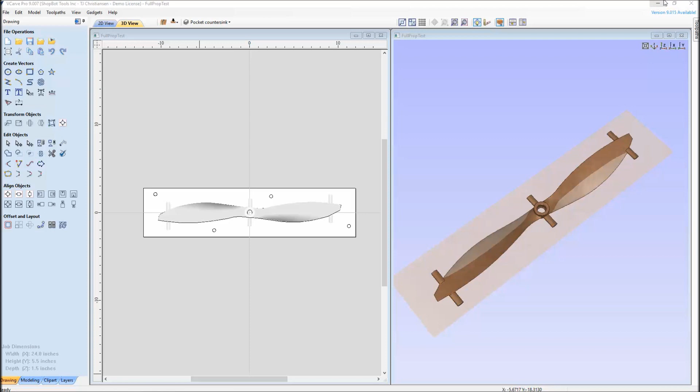This is TJ with ShopBot Tools, and today's online training is going to talk about two-sided 3D carving. So what we'll do is we'll first look at our file here, and then we'll go out on our machine and show you the process of trying to flip this part over so it lines back up so we can cut it from both faces of this material.

After we get the design portion ready in the software, what we'll do here is cut it from the first side. Use our layout holes where we use 3/8 dowel pins, drill those in, switch the board back, do the same dowel pins in the spoil board, flip it directly over on top of itself, lining up using the dowel pins, and then cutting the second side. Hence the two-sided 3D machining.

A good portion of this training will be using the Vectric software, and I will tell you that a lot of the information that I am using comes straight from their video tutorial browser. They already have a wonderful set of videos and tutorials, and I'm referencing today a lot. When I first started getting into doing the two-sided carving was this two-sided marlin, where I could go in here and watch the different tutorial on all the specifics to the Vectric software. So I'm going to cover a lot of these today as well, but I'm going to show you more tips and tricks for setting this up on the actual ShopBot.

So I'm going to create the new file, and today's job is, as you saw in the example, I went and got a 2x6 from Lowe's or Home Depot. It's something easy to practice on. So if you make a mistake, you forget your tabs, your hold down, you flip the wrong way, it's out of a piece of 2x6 pine. It's not the most expensive wood. And then once you get the system down, you've done it a few times, then it's nice to go into something a little nicer quality wood as far as the way it's going to turn out.

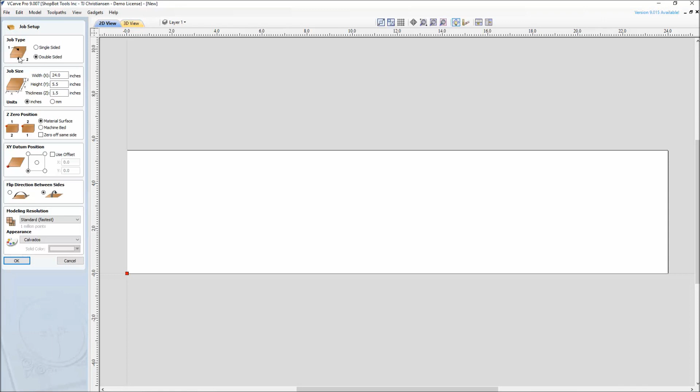So let's just go through, and again, I'm going to paraphrase a lot of that tutorial. It is a double-sided machining because we're going to be cutting from two faces. The material I have here is 2 foot long. It's a 2x6, so it measures approximately 5.5 inches wide, and the thickness on that material is 1.5. The way I like to set up a two-sided machining, again, there is no right or wrong. It's all personal preference. And this is just what I've done for a few of my two-sided machinings and had success, so I'm sharing that with you today.

The material surface is where I like to zero, but I also like this option that Vectric has put in here where you zero off the same side. So what that allows me to do is on the first face, I zero off the top. And then when I flip it, I'm able to zero off that same top even though it's down below. So I'll actually be zeroing to the machine bed next. The software takes into account the flip and does all the math for you.

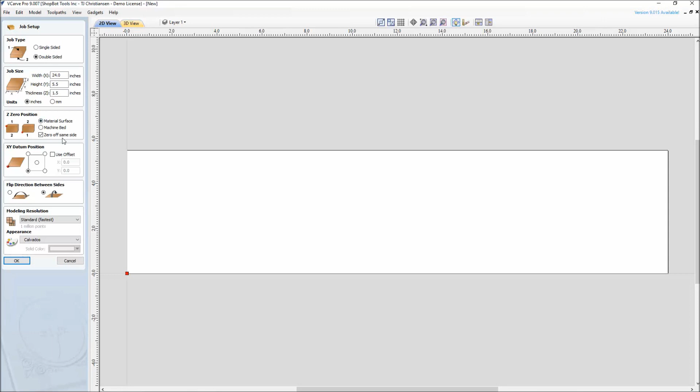The key though is the XY datum position and moving that to 0, 0. That way your flip plane, whether you're flipping along the X or along the Y, and in this case I'm going to flip over across the Y. So what's nice about having your XY datum position in the middle, it gives you a plane here that's easier to flip. And whatever your job size here, if you're off a little bit as far as width and height, this helps take that into account with your 0, 0 in the middle.

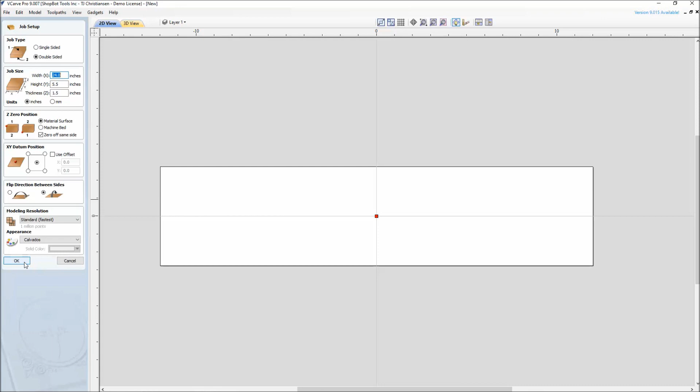So with that being said, I'm just going to double check this. I got my material size. I've cut it down to 24 inches. It's just a 2x6. In inches, I have a 0 plane on the top with a flip, 0 off the same side, and I'm going to go ahead and hit OK, and that sets up my job. I just need to remember which direction I'm flipping between sides.

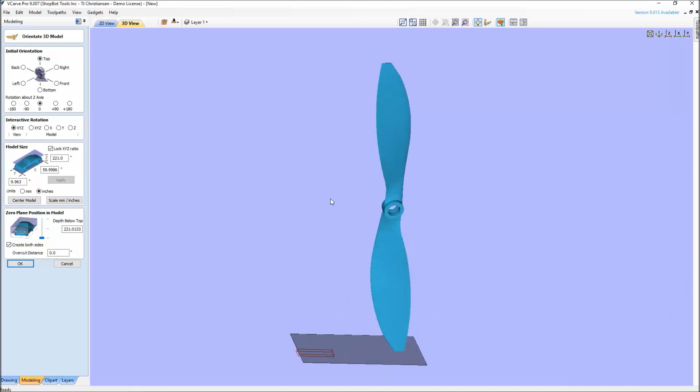Now we have to import the model, and the way we do that is come down here to the modeling tab, and up here is import component or 3D model. And today's example is going to be using a two-sided propeller, so I'll bring in the prop file. And a lot of imported 3D files come in a lot larger. Here's my material down here. This solid line box is my material. This wireframe box here is my material.

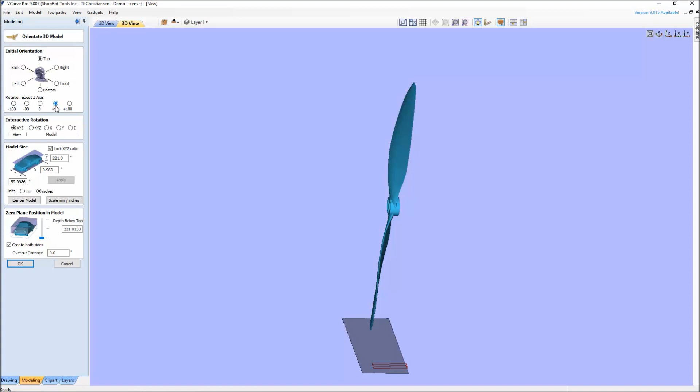My propeller is obviously quite large and out of proportion and orientation. So I will just sit here and manipulate the way I want to bring this in, which face I want to bring it in from. And that's just a matter of me messing with this model, and this is exactly what you would have to do as you brought stuff in.

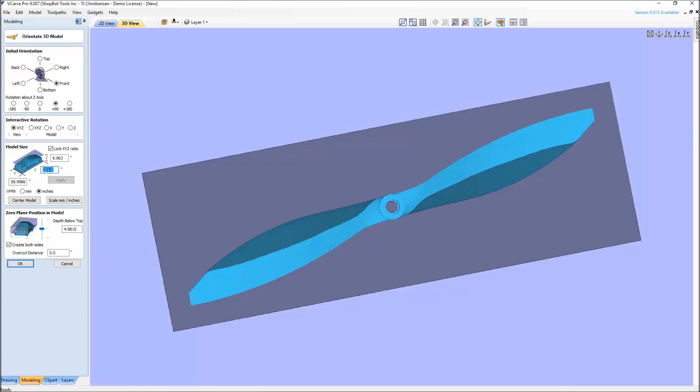I'm going to center that on my material. It hides it down in there. And since my material is only 24 inches long, I'd like it to only be about a 20-inch long prop. I hit apply. I can see that it's on there still, but it's still really close to the edge.

I want to look at this straight from the top, my Z, and I can interactively rotate this too by clicking on my Z, and that allows me to spin the propeller and get it straight back and forth so it's in there. So I've scaled it. I've got it flat, the direction I want. That's just a matter of you playing with the model that you're going to bring in.

I do want to create both sides. I do want it centered. I do like to center my models when they're proportional like this. Otherwise, you can mess with the up and down direction here, but it is nice to double click here, keep this centered.

And then I do like to have an overcut that goes at least past. I'm going to use a 1/4 inch diameter ball nose, and really you only need to go the radius of that bit, so you get past what they call the cusping, and that helps you get past where that ball nose portion of it is. I tend to do a little bit more dramatic with my overcut, and that gets a little bit more past, if I was off on my material thickness or whatever. So I just leave this right at my bit diameter. It just helps me remember things too.

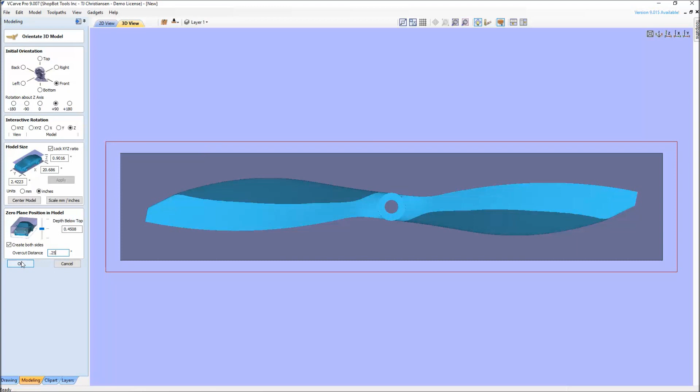So overcut, create both sides, and I've got it now in my model inside my wireframe. I'm going to go ahead and hit OK, and we're ready to move forward and set this model up. Set this up just like we did in the VCarve Pro. So first thing we're going to do is hold down our board, and I'm just eyeballing it off the bottom left corner, even though that's not where we're going to 0 it.

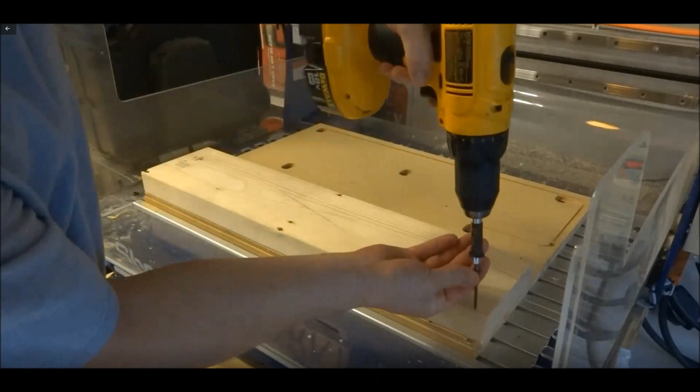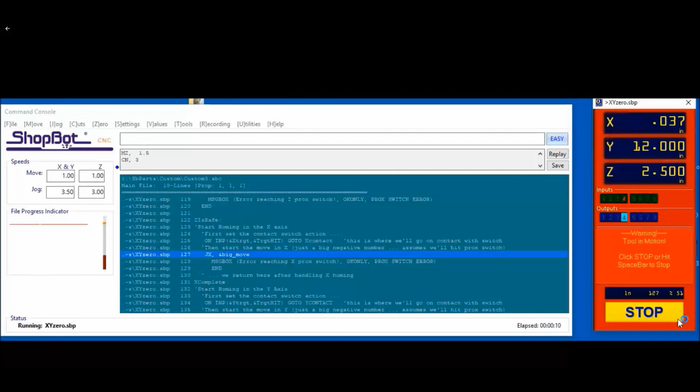And I pre-drilled the corners, and I'm opening up my ShopBot software, and I'm going to 0 out my X and my Y axes first. So use the proximity switches so you're working off your bottom left corner. That way you've got a reference in case you ever lose power or you have to reset or anything. So we'll start there. It sets us up, goes over, goes off 0.

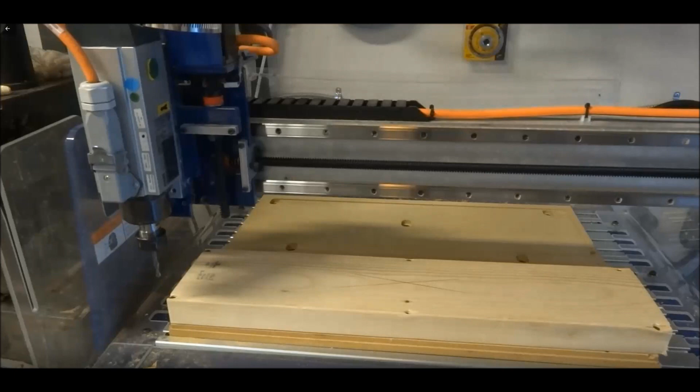Now remember, in the drawing CAD file, we're using the center of our material, which is where the X is. So now I'm going to use the keypad in the software to eyeball that and get it close. So bring up the keypad, go back and forth until you get it in the X and Y. You can switch it to fixed mode. Fixed mode allows you to dial it in so you can get it real close. You can also 0 your Z axis right now and just get it down until it touches. And then you can temporarily make your new 0, 0.

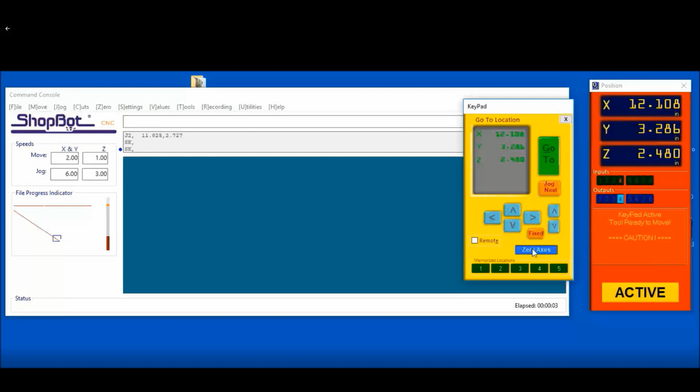So what we're doing is we're making a temporary 0, 0. If this is new to you, you might want to look in temporary zeros and offsets. Maybe look into the documentation or training. But what I'm looking to do here is I want to make this center of my bit my new 0, 0 point. And I zeroed it off the proximity switches first because that's how far I just moved it over in the X and in the Y.

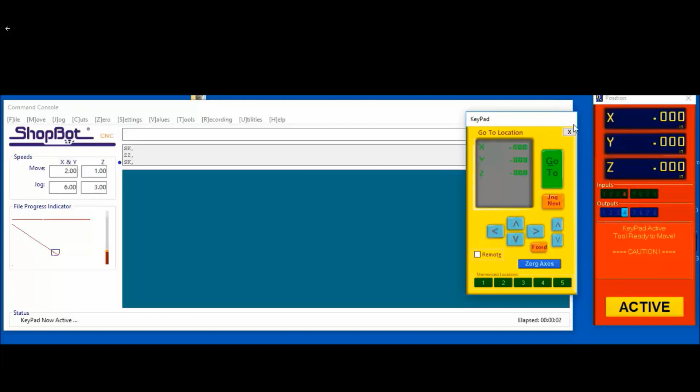And I have those as reference numbers in case I have to reset my computer or I lose power or anything. But I am clicking on my X and my Y, and I'm zeroing them out right now, and I've made my temporary 0 to run this file.

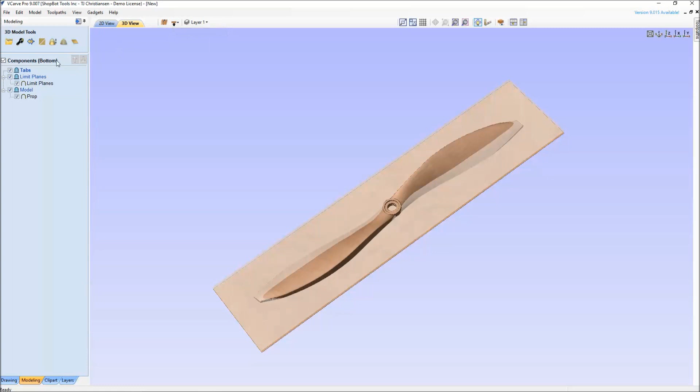So in the Vectric software, again, looking at the two-sided machining, if this is your first time, I would really recommend looking at some of the other tutorials. But for you first timers that are watching this one, up here is where you can switch between your top and your bottom plane. You can see it changing here. If you have both your 2D and your 3D forward, when you click between, you can see this scale gets grayed out when it's on the bottom.

And you see the arrows also when it switches between the top of the two. And over here, again under your modeling tab, you have your limit planes. And you can always go in here to your properties and see where they're at. Again, if you're going to be doing more of understanding how 3D modeling works, and in essence you've never done it before, I would go back to the Vectric tutorial.

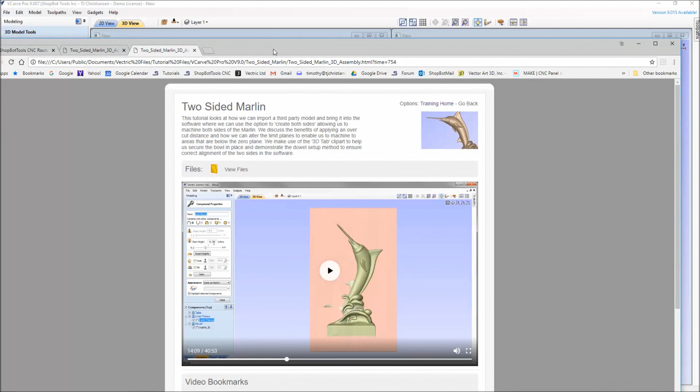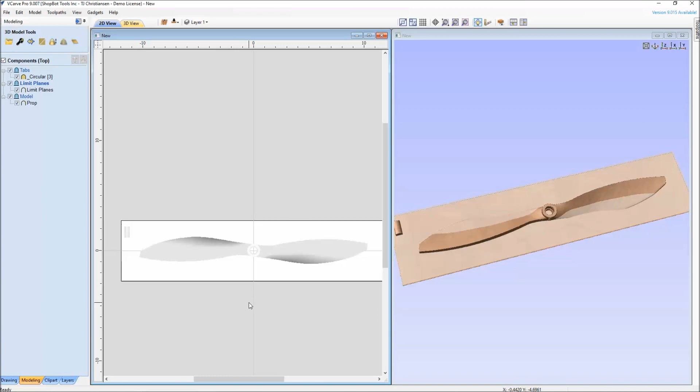What I want to show you more today is you've watched the tutorial, you understand how the software works. Now let's put it on the ShopBot and flip it and cut it and make sure it lines up. We'll also need to add tabs to this propeller to keep the part, one, from vibrating during the cut and affecting the edge quality, and two, just from falling out as we cut through it. So I've included a tab in the file that you can download for this.

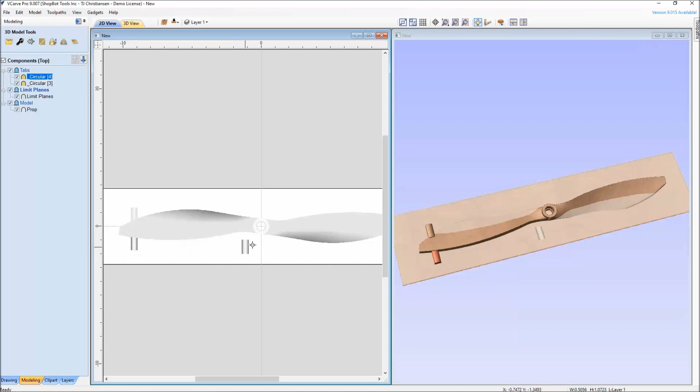You could create your own, but what I'm going to do is just place this tab, and instead of making 6 new tabs, I can just hold Control on my keyboard, and that allows me to drag a tab and drop it. And I like to just do one by one and place them. With this being a very thin propeller, I really don't want to take any chance of the whole thing vibrating. So I'm going to go ahead and manually put my 6 tabs in place.

So here's your tabs up here underneath the component tab, and you can click on it and see the shape height. So if you want to increase tab size, obviously you can grab the tab here and stretch it in width, which also changes the height because it's proportional, being 3D. And again, that's where you can change all the tab sizes if you want.

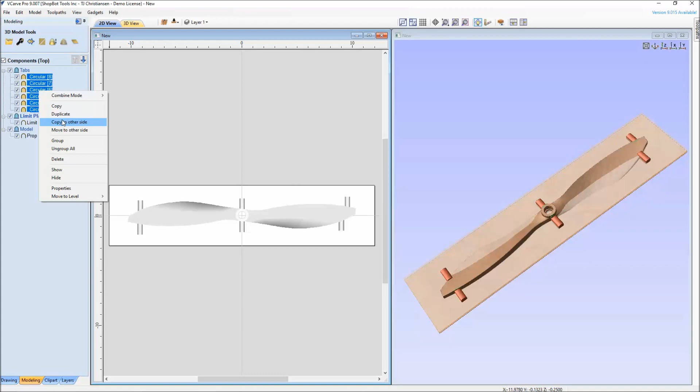And what I'm going to do is select all 6 of my tabs, and right click and go copy to the other side, because I want these 3D tabs to be on the front and the back side of this. So when I hit copy to other side, it now puts the tabs on the other side. So when I switch between my 2 sides, I can see that the tabs are lined up on both sides.

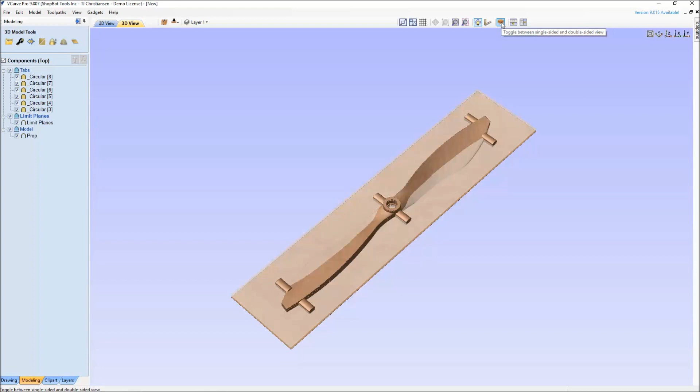So with the tabs in place, I can maximize my 3D view, and what's nice about the software here is I can hit the equal sign, or I can toggle by clicking on this icon, and it shows me how big my actual tabs would be on both sides. So I can see I have a pretty good tab, and I could sit here now and mess with heights and whatnot and get the tabs centered in here. But again, use the Vectric tutorials that already exist for that.

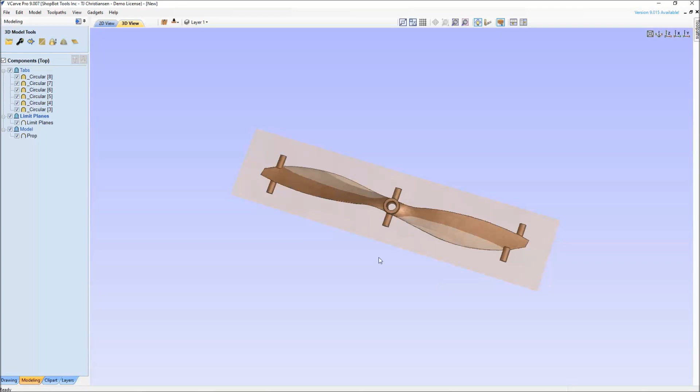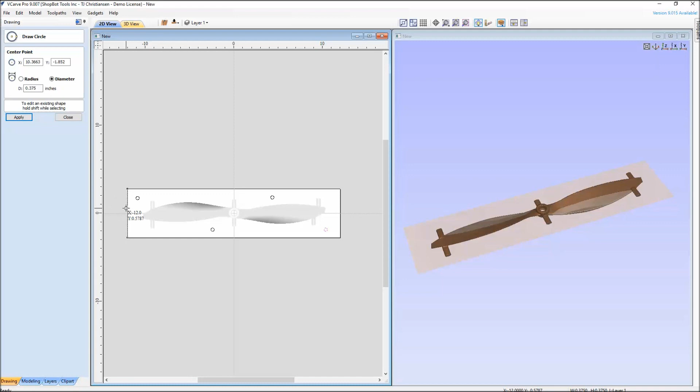Let's go ahead and get this toolpath and set up for machining and flipping on the ShopBot. And to make it easy on ourselves, when we go to flip this, we need some alignment holes. So what's nice is the circle command. I like to use 3/8 dowels, and these I just randomly put in. You don't need to symmetrically put these. If you do, when you go to flip the thing, it'll be easier for you to accidentally flip it the wrong way. So just randomly put in those 4 holes. Those will be where my dowel locations get drilled into the material and into the spoil board for flipping.

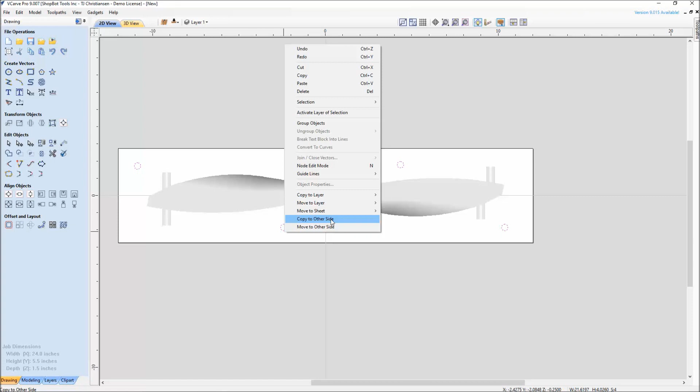So let's maximize this here in the 2D view. And just remember, once you've got these 4 drawn, or however many you put, I just want to select the dowels. And once you are done, right click and just do a copy to other side. And when you do a copy to other side, when you do your flip, it shows you that it put them in the mirror direction that you have it oriented for your flip. So just keep that in mind. Again, all in the tutorials for the drawing software.

Let's get into toolpathing and show you how this is done out on the machine. When you first switch to the toolpath side, it will bring up your material setup, and the software allows you now to make sure your model is positioned in center. So if it's not, you can just double click on center. It moves you back in the middle. And just double check, if you don't have any clamps or anything, your Z gaps and home position.

I like to move mine back a little. I have the room on my ShopBot, so when I'm done, you'll see in the video it goes back 10 inches, which goes out of my way, so it's not in my way when I'm ready to flip it or use the screw gun or change bits or whatever it may be.

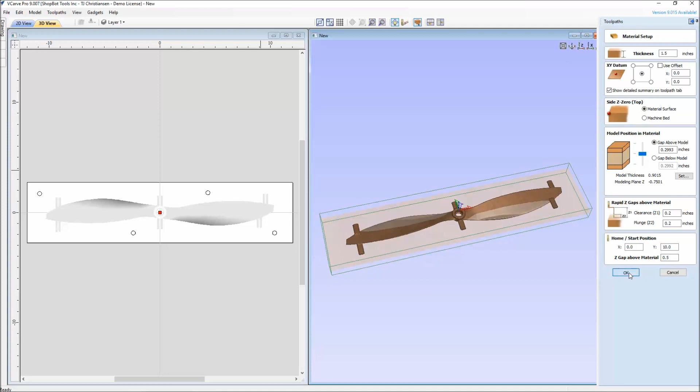And then for me, again, what I was trying to say is when I don't have to change bits, that's great. So to get a finish on a propeller like this, I can get away with using a 1/4 inch ball nose. So I'm also going to use that ball nose for my dowel pins, which I'll just use a profile toolpath. Since it's an inch dowel, I want to go half of it into my spoil board and half of it into my material.

Being that it's a ball nose, I just want to cut a little bit deeper into the material and the spoil board, so I'll just go a little bit deeper with my 1/4 inch ball nose. The top side, I'm a little bit more aggressive with my cuts because there's still a lot of material left. So I'm going to go 5/8 deep with my 1/4 inch ball nose, and I'm going to just add a spiral ramp to those 4 holes right there.

And that'll be my top. I'm on my top side still for toolpathing this, and I want to call it that so I know what this is. This is a dowel hole. Let's see if I can spell here. Dowel hole for top of board. And I'm very clear on what this is called because when I get out there, I've got a lot going on with the flips and whatnot.

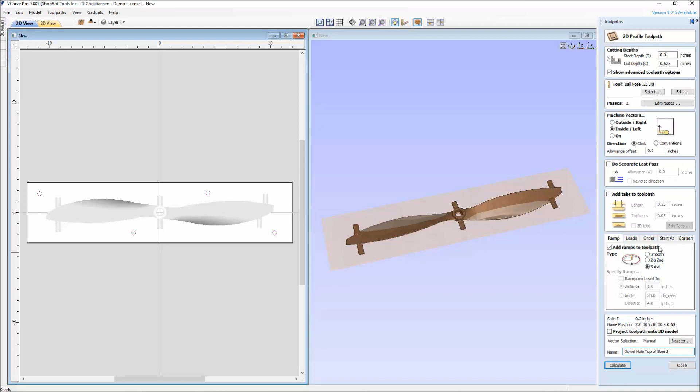So I've got an inside ramp cut, and I'm going to calculate that. And it's going to show me right here on the spoil board on the 3D, and there's my start back there. It comes in, cuts my 4, and there are my 4 cuts for the dowel holes. So that's just going to be the location. The next thing that we'll have to do is come in and do the roughing toolpath.

So the roughing toolpath is this one here, and I'm going to use that same bit. Again, I'm just saving myself a bit change. It's just a personal preference. I'm going to reference the tutorial from Vectric, and I like to do selected level, and I like to do it from my model level. And the boundary offset needs to be equal to whatever your tool diameter is. So I'm going to use a 1/4 inch bit. I have a boundary offset of a 1/4 inch.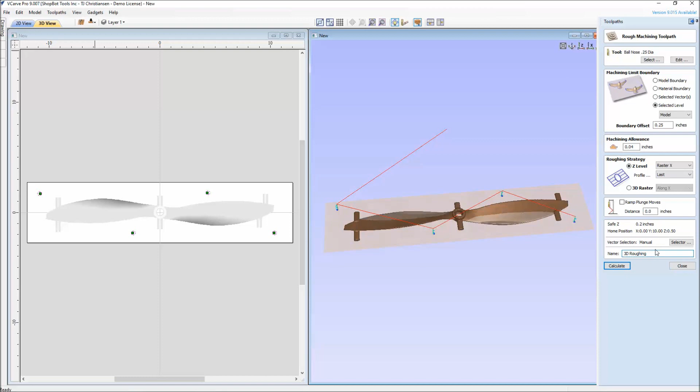And then machining allowance is how much material you want the roughing to leave on top of the finished cut. So 30 or 40 thousandths is fine. And again, instead of just 3D roughing, I'm going to call this 3D roughing top side so I know which one it is. And I calculate that, and it starts bringing this one in.

And I'll finally finish that up by doing a finishing toolpath, same bit, selected level, model, because I'm bringing that off the model from back here on the drawing side. And the boundary offset needs to be the same as your tool diameter. And then it's a personal preference if you like to do an offset or a raster. Personally, I like to raster back and forth with the grain. I usually get a lot better edge quality cut.

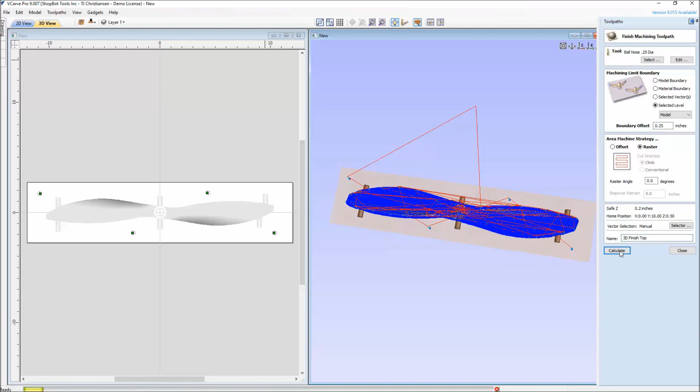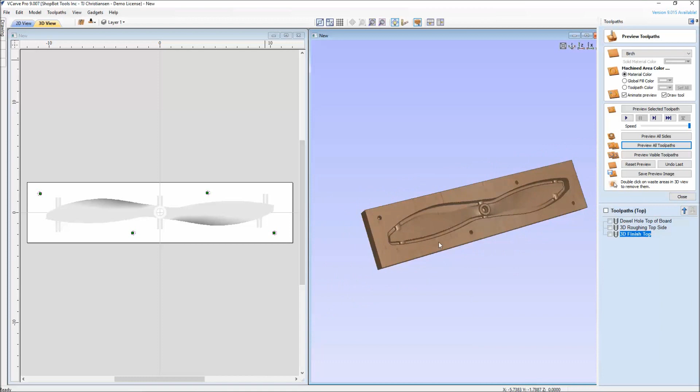And then again, a name that makes sense. Top. So I hit calculate. And now you can see that I've got my top side calculated. And I can preview all those tool paths, roughing, finishing. You can see the tabs around there. I left some pretty big tabs because I want you to see them in the video, and I don't want to take any chance of them falling out. So there's our holes, our roughing, and our finishing. Let's take a look at that out on the ShopBot.

So what's nice about the way we set this up is it's using the same bit for all the different tool paths. So first is drilling our indexing holes, which we'll use the 3/8 dowels for. It's doing those first, and then it's going to do the roughing tool path and the finishing tool path. And we just used the 1/4 inch ball nose for all three. So remember, I cut a little bit deeper for the indexing pin holes to make up for the ball nose at the bottom, to get around the cusping part of that.

Now we're doing the roughing tool path. So we're roughing it out at a heavier, faster speed. And again, we're all on the first top face right now, so it's nothing more than just a regular 3D carving that we've done before.

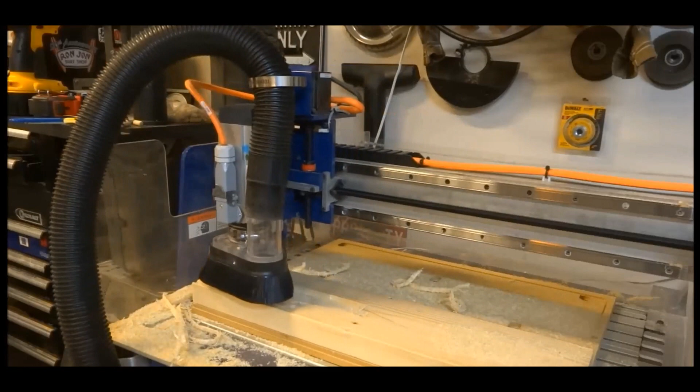I got the dust collection on just to show you that it's good to keep the dust collector on. It does a lot of good for you, dust in the shop and breathing and all that. So leave the dust collector on whenever you can. A lot of times in the video I take it off just so you can see what's going on.

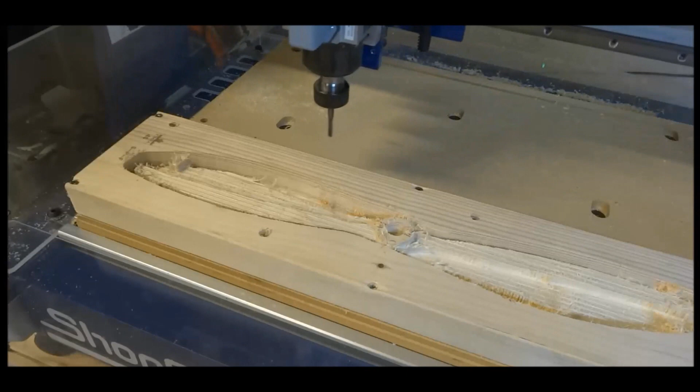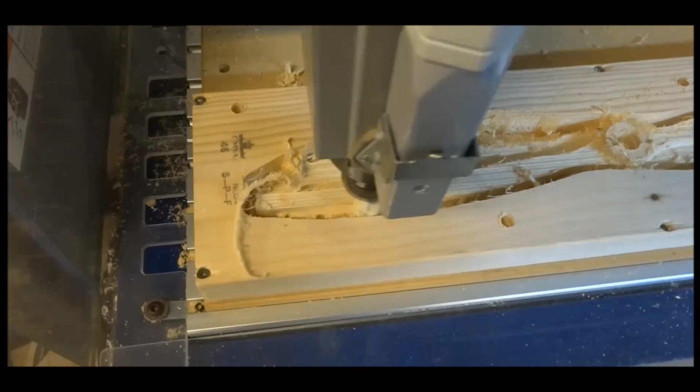When it gets done with the roughing tool path, now it's going to go back and forth and do the finishing tool path. So the finishing tool path, again, same bit up on top, the 1/4 inch ball nose, and this is going to work itself back and forth, and we set it up in the drawing software to go back and forth with the grain. So we can see that go back and forth, and this will finish up the top side of the cut for our propeller.

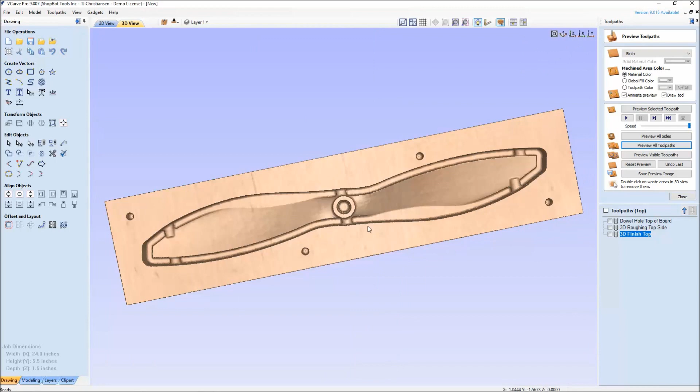Alright, once the top side's done, before we even pull it off, I want to go back to the software and make sure we get our files right. So this is what we're looking at so far for our cut. We can see the tabs were cut from the top side. Again, I can flip over right here, toggle to the bottom, and I don't have toolpaths yet for the bottom. So what I want to do for the bottom toolpath now is I do need to have my 2D view open so I can see where my layout holes need to be.

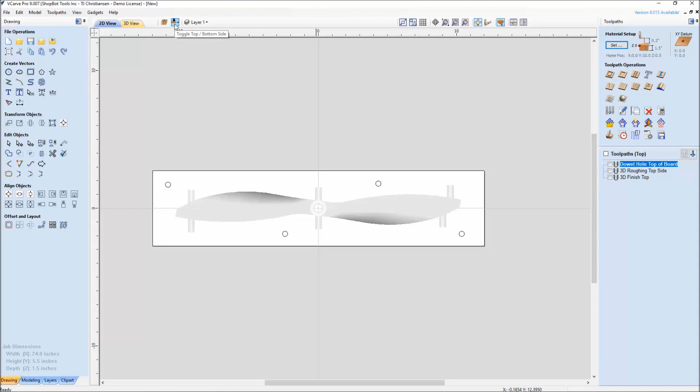Now that you see that we have switched it from the top view to the bottom view, notice when I toggle between the two, look over here on your right hand side where your material setup is. Notice that our first time when we make our face cut on the first side, it was to the top of the surface. And when we set up our job, it flips over, and now we're zeroing to our machine bed. So you need to make sure as the operator of your CNC machine that you are doing what the software is doing as well. So now that it is at the material bottom, which is your spoil board surface, you need to make sure that's what you do, and you'll see that in the video as soon as we're done tool pathing.

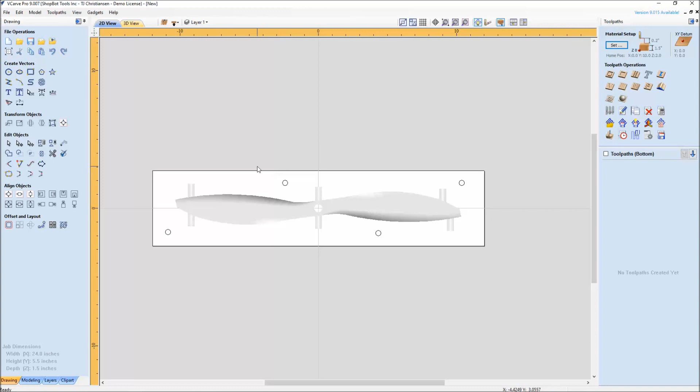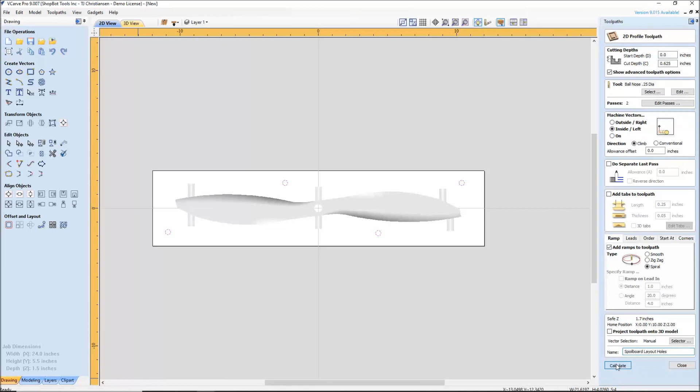So same thing that we did before, we need to grab our 4 holes, and remember that they are now mirrored, and notice the way we've mirrored them over, so that we also have to make sure we flip our board. You'll see that in the video. And again, same toolpath. I'm not going to change any settings on that. I'm going to add my ramp so it spirals down in. I'm going to use the same ball nose. And again, I want to name things so I know what they are. It's a lot easier to have a name when I get out to the machine. I'm going to call these my spoil board layout holes. Calculate, and then there they are. And again, we're just walking through the same process.

The only thing I would recommend you do, now that we're on the bottom, this propeller, if we look at this in the 3D view, is a small, thin 3D model. And it's only got these 6 tabs that are holding it in place. So what I would recommend for this one, on the bottom side now, since we've already cut away the top, and we're going to start exposing the through cut very soon on our through roughing tool path, is same tool, same process, same tool path, same bits,

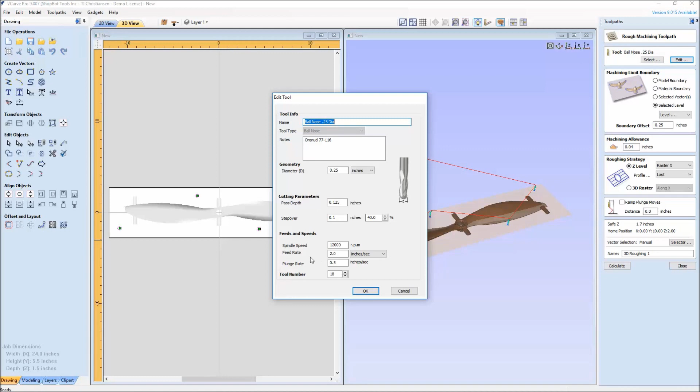but slow things down a little bit, and instead of having such a deep pass as we did on the first side, even though it's a 1/4 inch bit, I'm going to slow this down to a 1/8 of an inch pass depth and a slower 2-inch feed rate. So it may take a little bit longer to cut, and that's fine, but doing so, I know that it's not going to vibrate or give me chatter marks. I'm going to be able to avoid all that stuff by slowing this down.

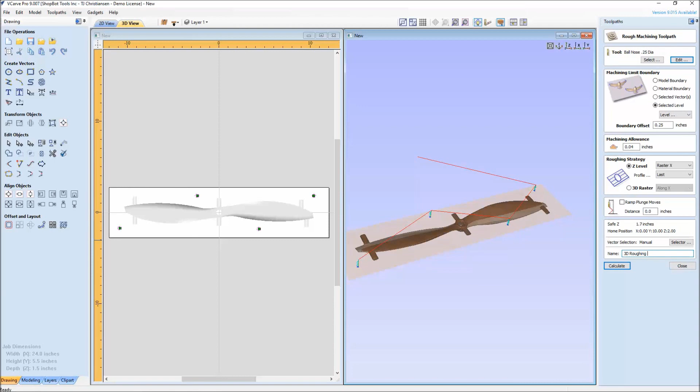So I'm going to call this 3D roughing, and I can call this second side. So I know what this is, and I have to make sure it's warning me that I forgot to grab what I'm supposed to have grabbed, which was up here underneath the selected level. I wanted to make sure I grabbed my model, and that way it's now just in the model and not

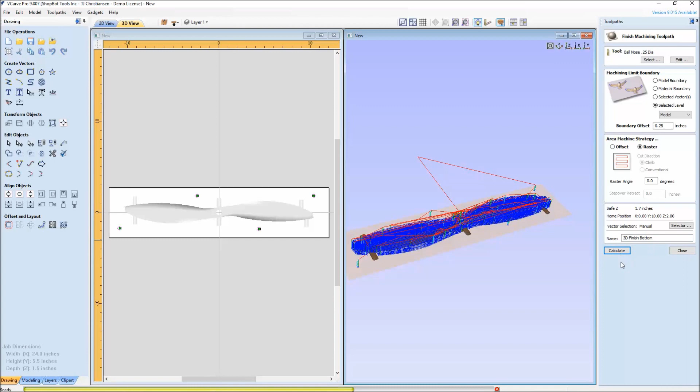the whole blank. And same thing here with the finishing toolpath on the bottom side, and we'll just use the same bit, same everything, grab my model, and I don't need to slow it down on the finishing toolpath because the finishing toolpath is just doing a thin cleanup around, and I'll name this one as well. And now you can see I have different names, so it's nice to have a nice consistent one.

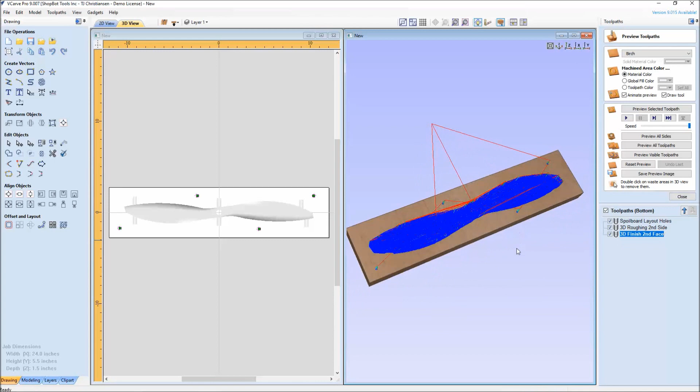So to change a name, I just wanted to show that you could double click on it, and instead of that saying bottom, I can call this second face. And now when I hit calculate, things line up. So I show that I'm on the second side. I've slowed it down. It's going to take a little bit longer to cut, but let's see what it looks like here in the video when I go and save this out. And you can see I'm cutting it now, flipping it, and cutting the second side.

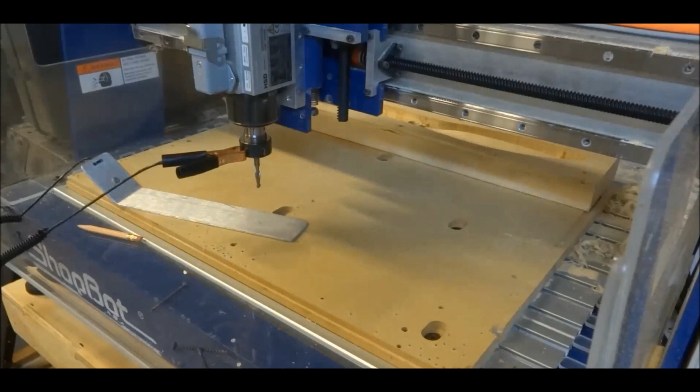And remember, we just looked in the software where when we flip it over, we're now zeroing to the spoil board. So I'm setting up my Z0 plate, and I'm just going to do the same routine I would normally do in my ShopBot software and zero my Z off the bottom. And then the first toolpath that I'll run is the 5/8 deep dowel pin locations, which is my 3/8 dowels. So I had those 4 holes.

They're going down into the spoil board, and I did lay those out in a fashion so they would not drill into the desktop hold down method, and we can see that back in the drawing file when we go back to that. So I'll move that out of the way, and then I will have to move my Z up so I can push my board forward, blow the sawdust out of those holes, put your dowel pins in place.

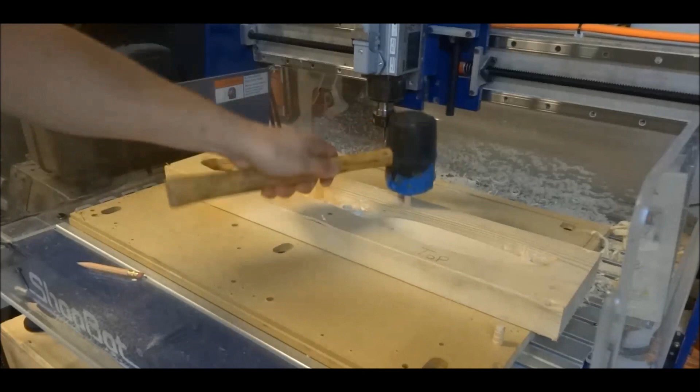And now, remember, the way we set the file up is just to flip it back over in the Y. So we're just doing a 180-degree flip over back onto its second face. So make sure you flip it the way you designed it. If you've designed it the other way in the software, just flip it 180 degrees lengthwise. But this is the way we flipped it in the CAD. So we flip it over, we run our screws in place, and now we're ready to run the second face.

So this is why it's nice to have our zero of our X and Y plane right off the middle. Everything is all off that zero plane off the middle. So it doesn't matter if our board isn't quite the right width the way we set up the file. It's all going to line up doing it this method. And let's take a look at that next.

Alright, we flipped it over now to the back side. And we'll start our roughing toolpath. And just notice that on this side, we've turned down our feeds and speeds a little bit. We're not trying to set any records here for winning a race. What we're trying to do is get in and rough this out, because we're soon going to expose through.

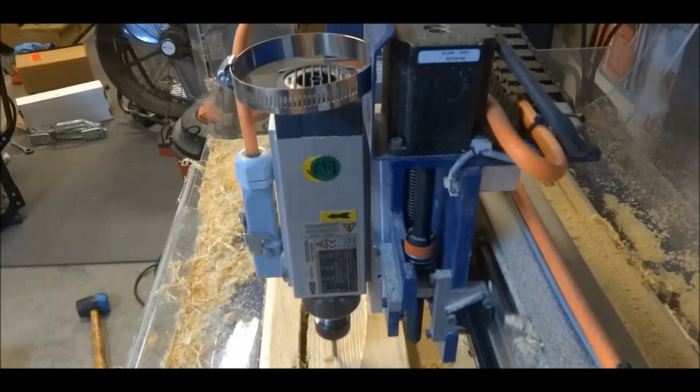You can already see around the edges that we've already exposed to the second side. So I've only got those 6 tabs that are holding it in place. So you can see that I've got it a little bit slower, and that's why I can use smaller tabs, so it takes a little bit longer to machine, but less time cleaning up tabs. And without the dust foot on, it does make a big mess, and it is pine.

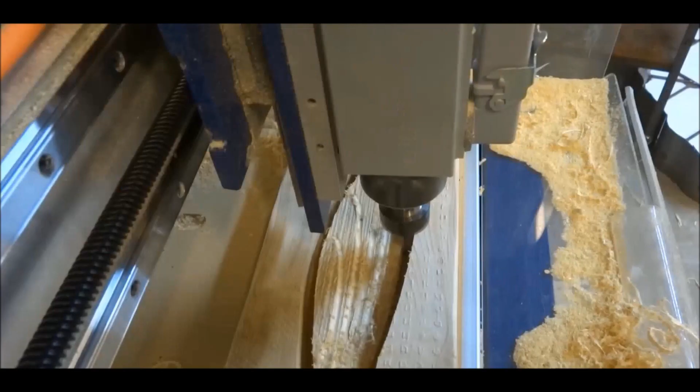It's a little stringy on the long cuts, but we can see that we're able to get down inside there. Now it's switched from our roughing to our finishing tool path, and now it's going to start finishing back and forth. And again, I set it up just personal preference to go back and forth with the grain, and that's all something that you can set up in the drawing software, in the Vectric software. You can set that up to go back and forth the way you want. You can see just a little bit of flex right there. That's why anything bigger than this would need a little bit bigger of a tab.

And now we can look, before we unscrew anything, we want to make sure we're through, we're lined up, if I need to make any adjustments. Because once I unbolt this, I can put it back in place because it is using the dowel pins, but it's always good to make sure before you unscrew it. And I'm going to pull this off here now and look, and it's great. It worked out great. I was able to flip this over and cut from 2 sides, and it's held in there tight with those 4 dowel pins.

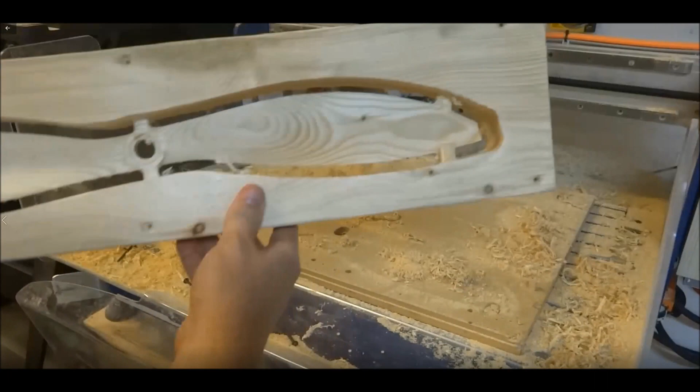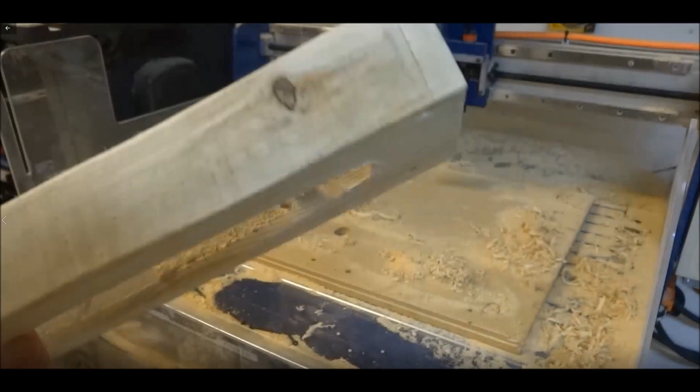And I was able to take a propeller, scale it to my board, and it was just nice cutting it out of some 2x6 material to test it with. Put some tabs in place to hold it there. Do a little bit of overcut, so you cut past the face that you want to cut into, and then you're able to successfully cut a double-sided 3D file. And this one just needs some cleaning up, and use a bandsaw to do that. But try this method with some different 3D files that you have that need to be cut from 2 different sides, and you'll see that the lining up the way we set up this file works great.

2-sided machining is definitely a big job to take on, especially if you're first getting started. So I would definitely recommend first looking through the help tutorial browser to become familiar with the software. And when you're familiar with the software, some things to just remember to keep in mind when you're setting up your job. It is nice to be able to have this option here where you can zero off the same side. So when you do the flip, it goes from the front to the back. You just need to remember that when you're zeroing it out on your physical machine, out on your ShopBot.

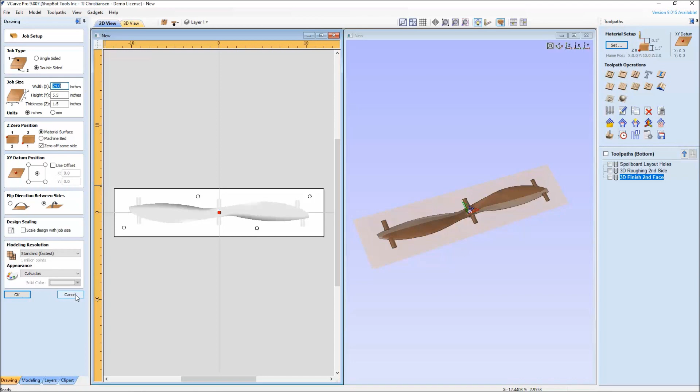Alright, remember up here too, this is where you toggle between the top and the bottom. You can toggle between what face you're going to look at. The brown right here shows that it's at the bottom, and when I toggle this, the arrow shows you that I'm looking at the top. Alright, over here on the toolpath side, it's going to change the toolpath between when you toggle up and toggle down. So label things so you know what they are.

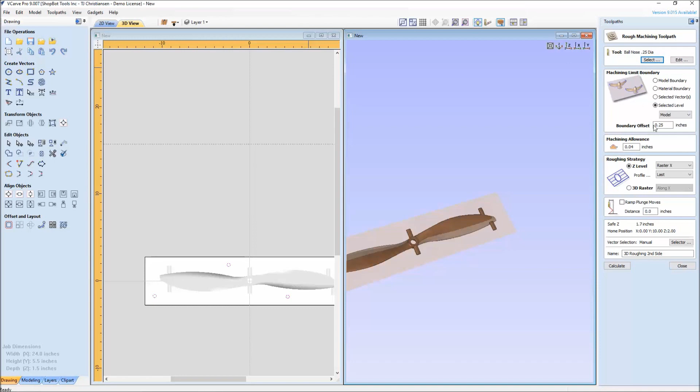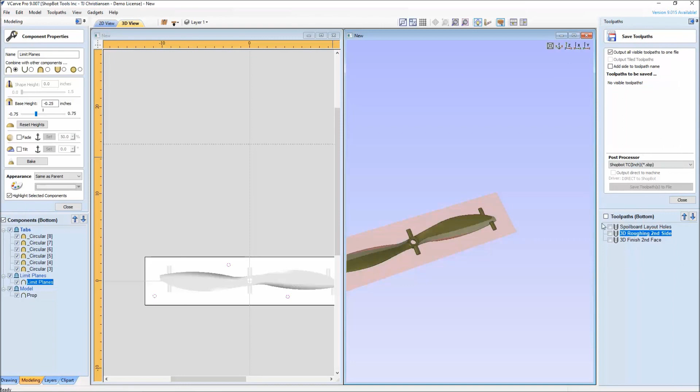Remember when we did our setup, whatever our bit diameter was is what we also used for our boundary offset. That was what allows you to get around the 3D file. Remember back in the modeling tab where we had our limit planes, and we were able to go in here, and this is where we could see our base height, and then we had a -1/4 inch, and that's what showed us what our overcut was, so we could get around the cusping as far as using that ball nose. And again, it was just a personal preference here on why when I saved this out that it used the ball nose, just so we didn't have to do a bit change.

So today's training was just giving you some tips and tricks and helpful setup and layout for doing a 2-sided 3D carving. So it's really going to take a little bit of practice until you've done it once or twice. And once you do it, it's really an awesome process.